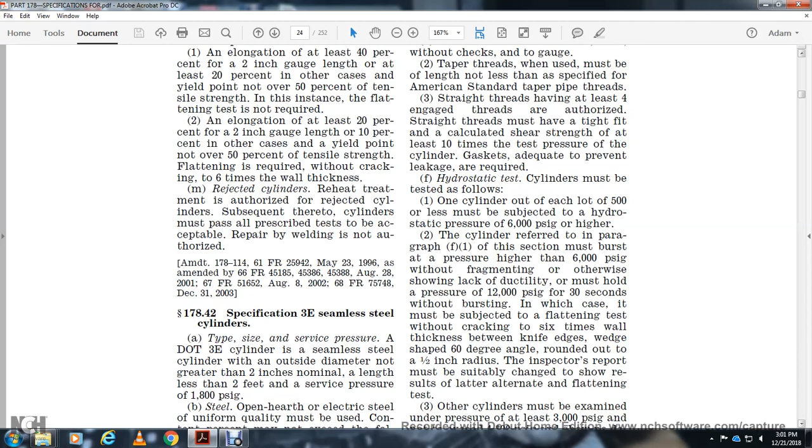Type, size, service pressure for DOT 3E cylinders: seamless steel cylinders with outside diameter not greater than 2 inches nominal, length less than 2 feet, with a service pressure of 1800 psi gauge. Steel: open-hearth or electric steel of uniform quality must be used, with content percent not exceeding the following: carbon 0.55, phosphorus 0.045, sulfur 0.050.

Identification: steel materials must be identified by any suitable method. Manufacture: cylinders must be manufactured by the best appliances and methods. No defect is permitted that is likely to weaken the finished cylinder appreciably. A reasonably smooth and uniform surface finish is required.

The thickness of the bottom is under no condition to be less than 2 times the minimum wall thickness of the cylinder shell. Such bottom thickness must be measured within an area bound by a line representing the points of contact between the cylinder and floor when the cylinder is in a vertical position.

All right, openings in the cylinder for connection with the valve or fuse plug. For the openings, threads conforming with the following are required. The opening threads must be clean cut, even, without checks, and to gauge. Taper threads, when used, must be of length not less than specified for American Standard taper pipe threads.

Straight threads having at least 4 engaged threads are authorized. Straight threads must have a tight fit and calculated shear strength of at least 10 times the test pressure of the cylinder, with a gasket adequate to prevent leakage.

Hydrostatic test: cylinders must be tested as follows. One cylinder out of each lot of 500 or less must be subjected to a hydrostatic pressure of 6000 psi gauge or higher. The cylinder referred to in paragraph F1 of this section must burst at a pressure higher than 6000 psi gauge without fragmentation or otherwise showing lack of ductility, or must hold at 12000 psi gauge for 30 seconds without bursting,

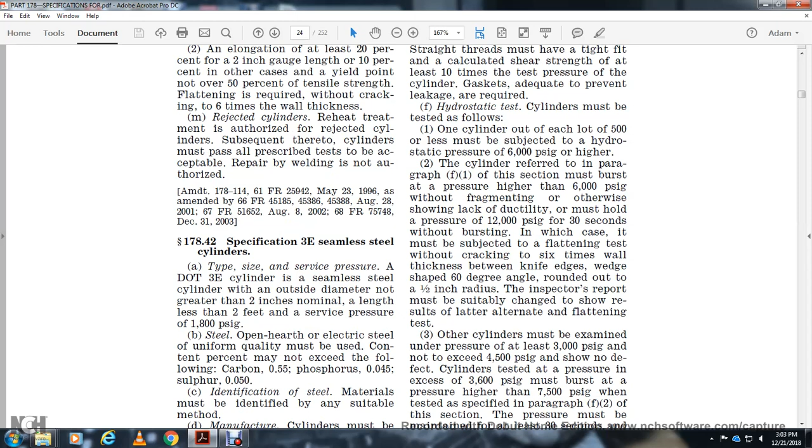Other cylinders must be examined under pressure of at least 3000 psi gauge, not exceeding 4,500 psi gauge, and show no defect. Cylinders tested at a pressure in excess of 3,600 psi must burst at a pressure higher than 7,500 psi gauge. When the test is as specified in F2, the pressure must be maintained for at least 30 seconds and sufficiently longer to ensure complete examination.

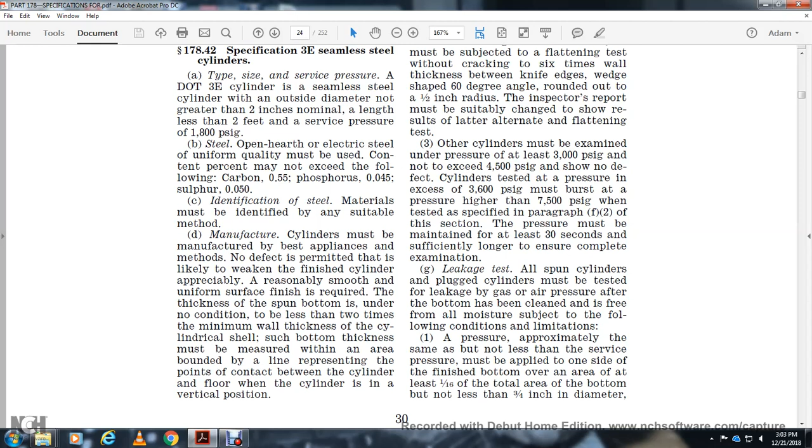Leak test. The spun cylinder or plugged cylinder must be tested for leakage by gas or air pressure after the bottom has been cleaned and is free from all moisture, subject to the following conditions and limitations. Pressure approximately the same as, but not less than, the service pressure must be applied to one side of the finished bottom over an area of at least 1/16 of the total area of the bottom, not less than 3/4 of an inch in diameter, including the closure, for at least 1 minute, during which time the other side of the bottom exposed to pressure must be covered with water and closely examined.

In case of leakage, except as provided in paragraph H of this section, the cylinder must be rejected if any leakage occurs. A spun cylinder is one in which an end closure in the finished cylinder has been welded by the spinning process. A plugged cylinder is one in which the permanent closure in the bottom of the finished cylinder has been effected by a plug.

Safety precaution: if the manufacturer elects to make this test before the hydrostatic test, the manufacturer shall design the test apparatus so that the pressure is applied to the smallest area practicable around the point of closure, so as to use the smallest possible volume of air or gas.

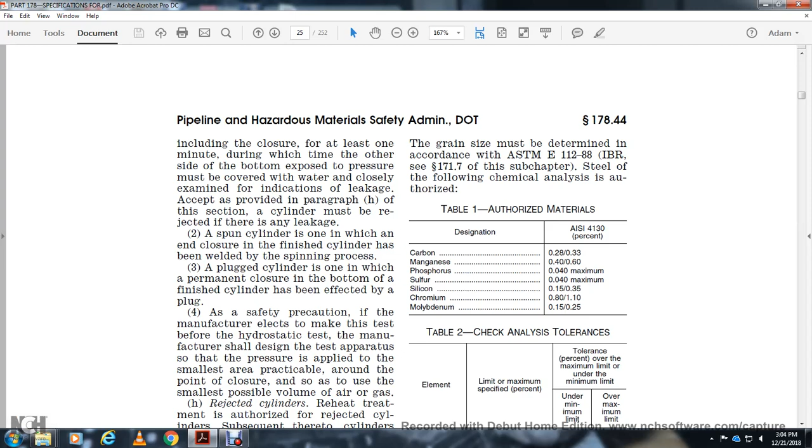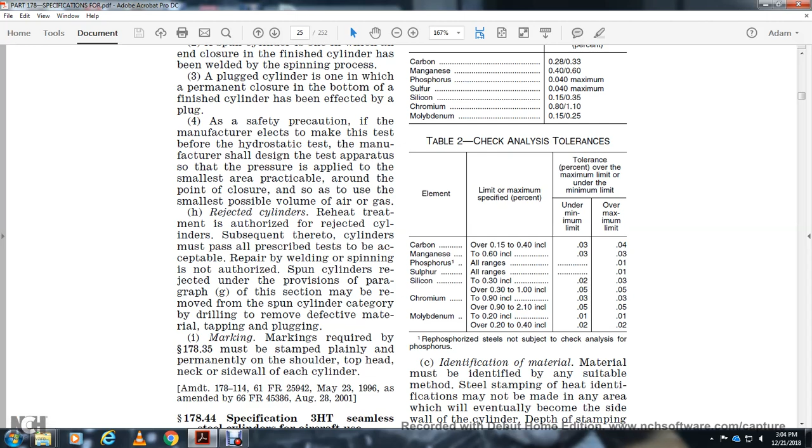Markings required for this 178.35 must be stamped plainly and permanently on the shoulder of the top head of the neck or the side wall. 178.44 specification 3HT seamless steel aircraft. The type, size, and service pressure: a DOT 3HT cylinder is seamless steel with water capacity not over 150 pounds and service pressure of 900 psi gauge.

Authorized steel: open hearth or electric furnace steel of uniform quality. The heat of the steel must be within the limits listed in table 1 of paragraph B, with the check chemical analysis slightly out of the specified range acceptable if satisfactory in all other respects, provided the tolerance in table 2 of paragraph B is not exceeded. The maximum grain size shall be 6 or finer. Grain size must be determined in accordance with ASTM E112,

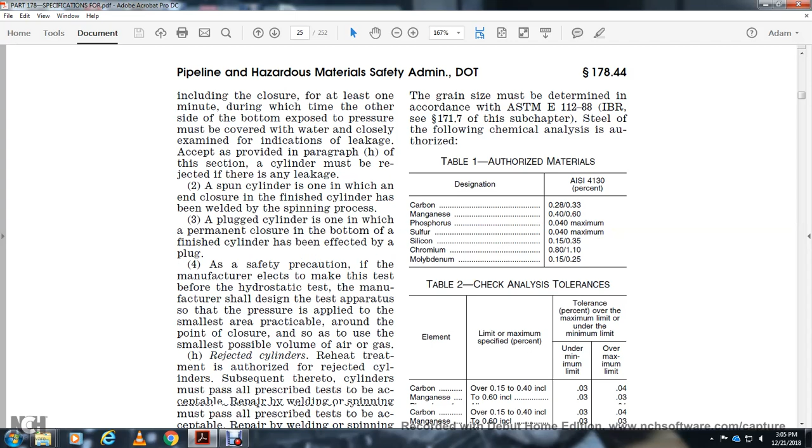112-88 and IBR 171.7 of this subchapter. Steel with the following chemical analysis is authorized, and then the chemicals are shown in the table of analysis tolerance. Identification of material. Material must be identified by a suitable method. Steel stamping of the heat identification may not be made in any area that will eventually become the side wall of the cylinder. Depth of the stamping may not encroach upon the minimum prescribed wall thickness of the cylinder.

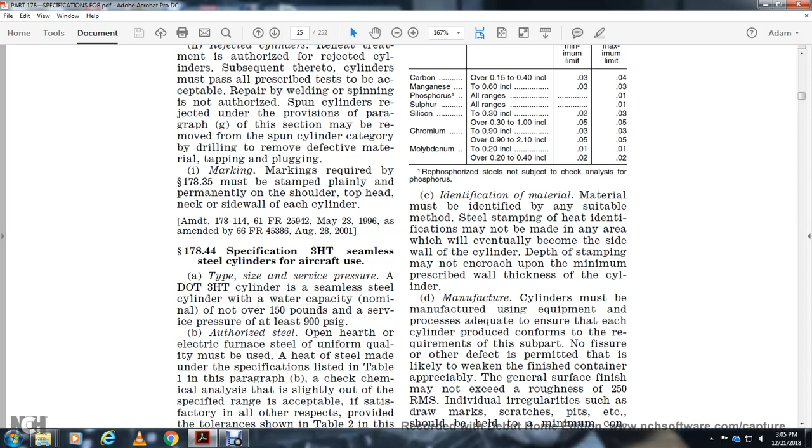Manufacture: the cylinder must be manufactured using equipment and processes adequate to ensure each cylinder produced conforms with the requirements of the subpart. No fissure or other defect is permitted that is likely to weaken the finished container appreciably. The general surface of the finish may not exceed a roughness of 250 RMS. Individual irregularities such as draw marks, scratches, pits, etc. should be held to a minimum consistent with good high pressure vessel manufacturing practice.

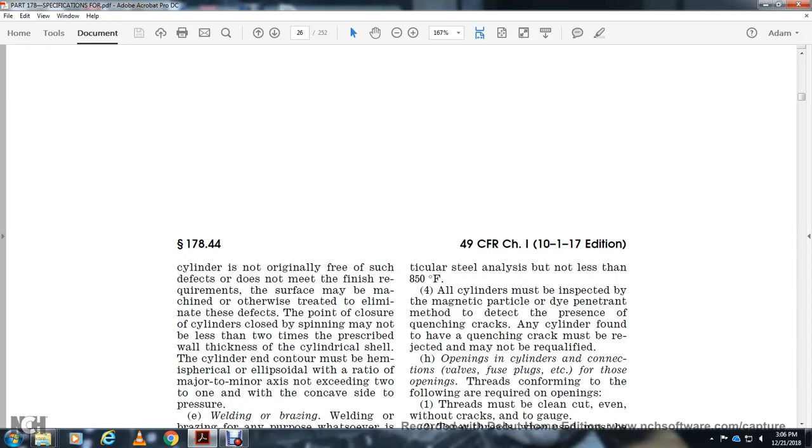If the cylinder is not originally free of such defects or does not meet the finish requirements, the surface may be machined or otherwise treated to eliminate the defects. The thickness at the point of closure of the cylinder closed by spinning may not be less than 2 times the prescribed wall thickness of the cylinder shell. The cylinder end contour must be hemispherical or ellipsoidal, with the ratio of the major and minor axis not exceeding two to one, with the concave side to pressure. Welding and brazing for any purpose whatsoever are prohibited, except for welding by spinning to permanently close the bottom of spun cylinders. Machining and grinding to produce the proper surface finish at the point of closure is required.

Wall thickness, minimum wall thickness. The wall of the cylinder must be at least 50 thousandths of an inch minimum wall thickness. It must be such that the wall stress at the minimum specified test pressure may not exceed 75% of the minimum tensile strength of the steel, as determined from the physical tests required in paragraph M of the section, and may not be over 105,000 psi. Calculations must be made by the following formula. Wall thickness of hemispherical bottoms is permitted at 90% of the minimum wall thickness. Each cylinder side wall may not be less than 50 thousandths of an inch, and in all other cases the thickness is no less than the prescribed minimum wall.

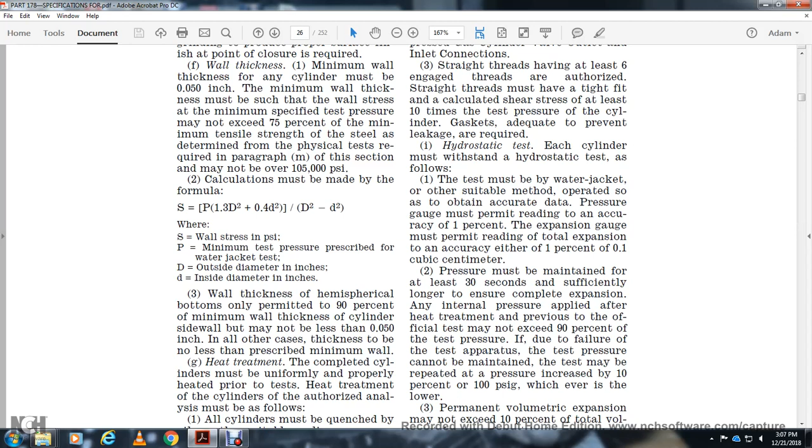Heat treatment. The completed cylinders must be uniformly and properly heat treated prior to test. Heat treatment of the cylinders of the authorized analysis must be as follows. All cylinders must be quenched in oil or other suitable medium. The temperature from which quenched must not exceed that recommended for the steel analysis and must not exceed 1,750 degrees Fahrenheit. Steel must be tempered at a temperature most suitable for the particular steel analysis, but not less than 850 degrees Fahrenheit.

All cylinders must be inspected by the magnetic particle or dye penetrant method to detect the presence of quenching cracks. Any cylinder with quenching cracks must be rejected. It may not be requalified. Openings and connections for valves, fuse plugs, etc. The openings must be threaded conforming to the following requirements: threads must be clean cut, even, without cracks, and to gauge. Taper threads, when used, of a length not less than specified for the National Gas Tapered Thread (NGT), are required. American Standard compressed gas cylinder valve outlet and inlet connections.

Straight threads have at least 6 engaged threads authorized, and straight threads must have a tight fit with a calculated stress shear with at least 10 times the test pressure for the cylinder. The gasket must be adequate to prevent leakage as required.

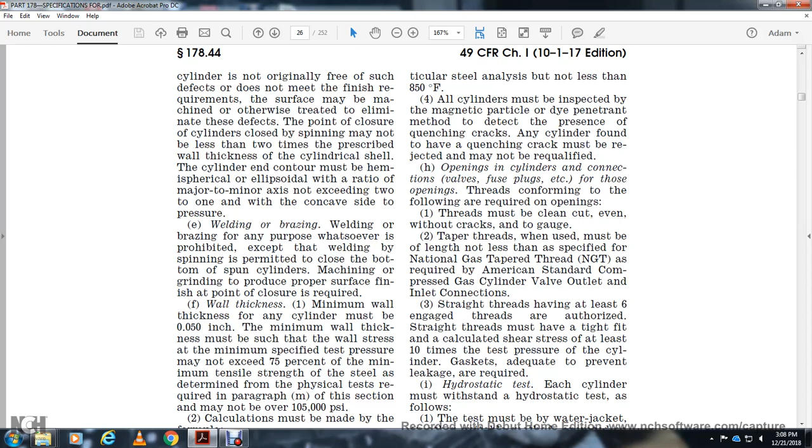Hydrostatic test: each cylinder must withstand the hydrostatic test. The test must be conducted with water-jacket or other suitable method to obtain accurate data. The pressure gauge must permit reading accurate to 1%, and the expansion gauge must permit reading of the total expansion, accurate to 1% or 0.1 cubic centimeter.

The pressure must be maintained for at least 30 seconds, sufficiently long to ensure complete expansion. The internal pressure applied prior to the official test, after heat treatment, may not exceed 90% of the test pressure.

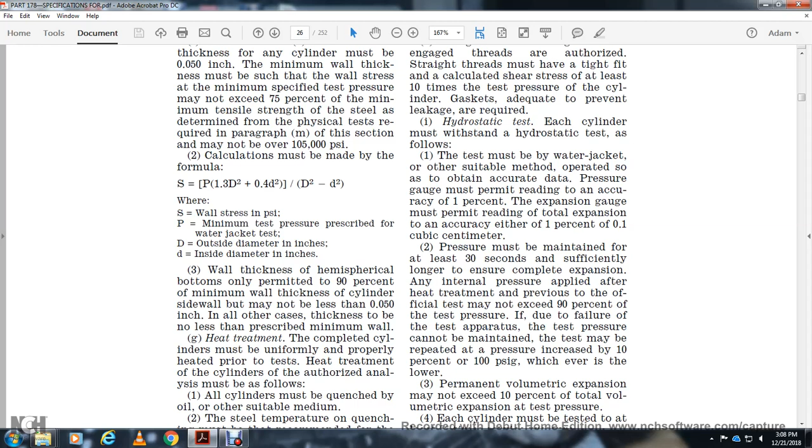If due to failure of the test apparatus the test pressure cannot be maintained, the test may be repeated with the pressure increased by 10% or 100 psi gauge, whichever is less. The permanent volumetric expansion may not exceed 10% of the total volumetric expansion.

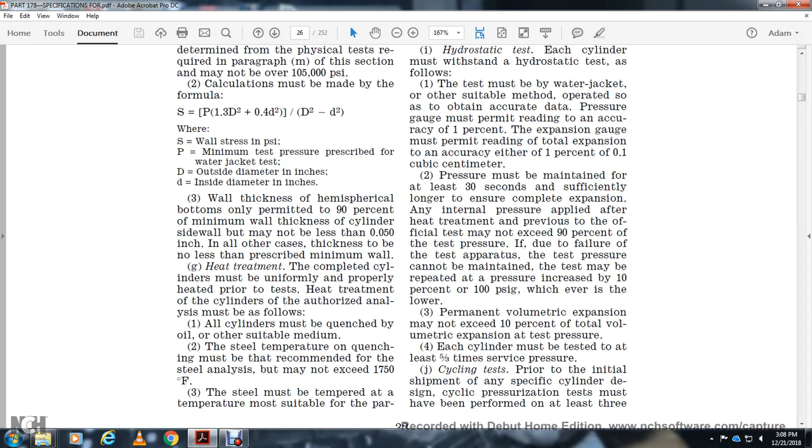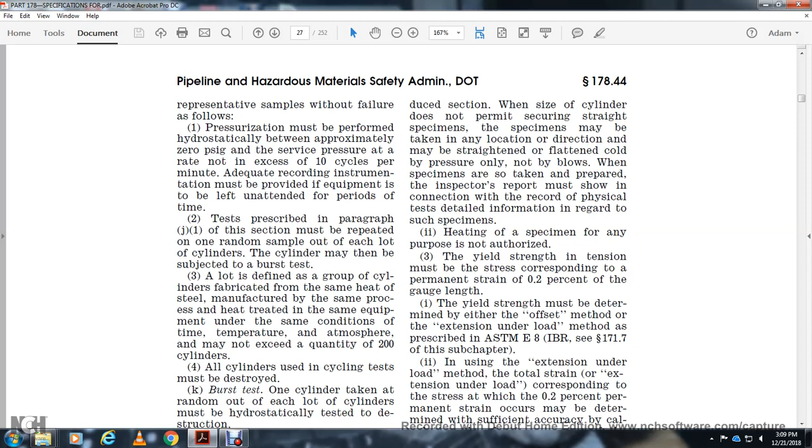All cylinders used in the cycling test must be destroyed. Burst test: one cylinder taken, selected at random out of each lot, must be hydrostatically tested to destruction.

Flattening test: a flattening test must be performed on one cylinder, taken at random from each lot of 200 or less. The cylinder is placed between wedge-shaped edges having a 60-degree included angle, rounded to a half-inch radius, with the longitudinal axis of the cylinder at a 90-degree angle to the knife edge during the test.

For lots of 30 or less, the flattening test is authorized to be performed on a ring at least 8 inches long, cut from the cylinder. Each cylinder is subject to the same heat treatment.

The thin cylinder physical test must be conducted to determine yield strength, elongation, and reduction of area of the material as follows. The test requires 2 specimens from one cylinder, taken at random from each lot.

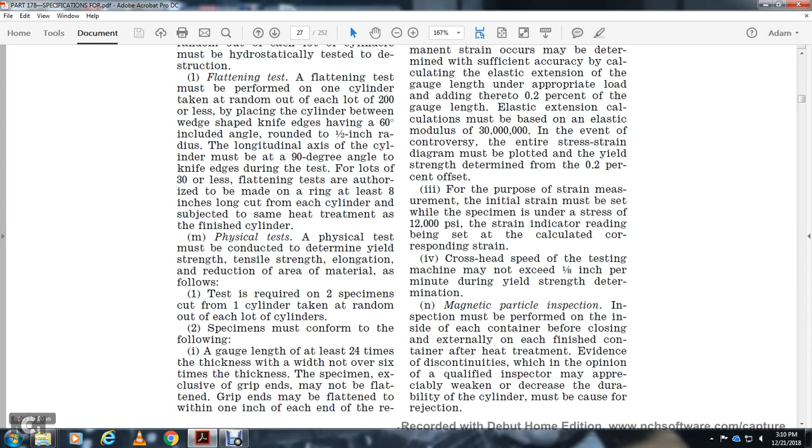Specimens must conform to the following gauge length: at least 24 times the thickness, width not over 6 times the thickness of the specimen, exclusive of the grip ends. The specimen may not be flattened, with the grip ends flattened 1 inch beyond the reduced section, where the size of the cylinder does not permit a straight specimen.

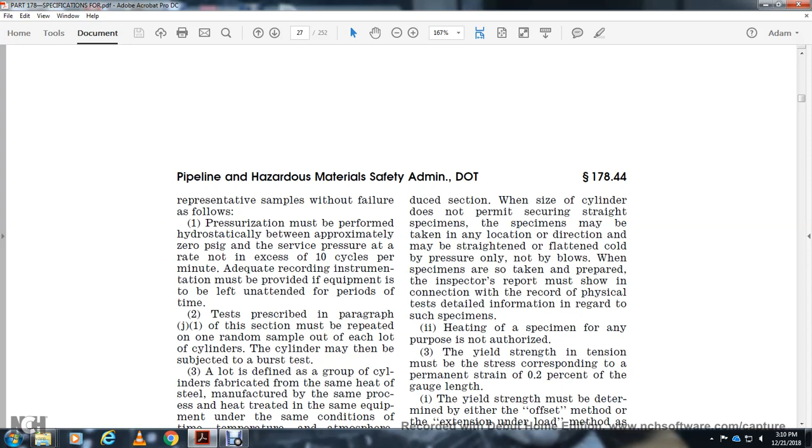Yield strength in tension must be the stress corresponding to a permanent strain of 0.2% of the gauge length. The yield strength must be determined by either the offset method or the extension-under-load method, as prescribed in ASTM E8.

When using the extension-under-load method, the total strain corresponding to the 0.2% permanent strain occurring must be determined with sufficient accuracy by calculating the elastic extension for the gauge length under appropriate load, adding 0.2% of the gauge length. The elastic extension calculation must be made with a modulus of 30 million.

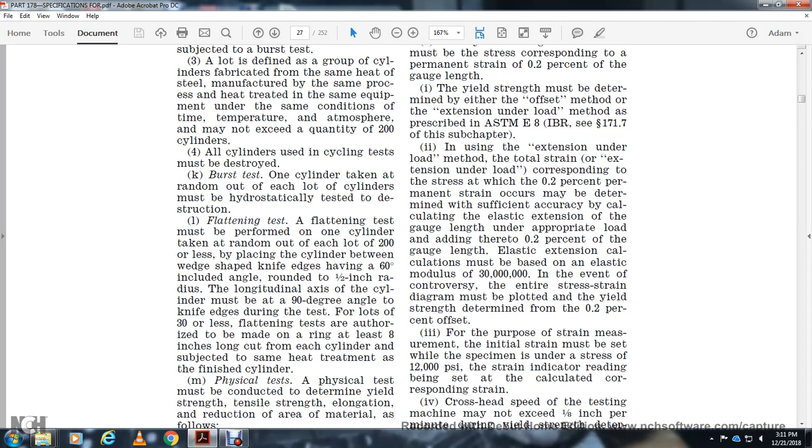In an event with a controversy, the entire stress-strain diagram must be plotted with the yield of the strain determined at 2/10% offset. For purpose of strain measure, the initial strain must be set with a specimen as under the 12,000 psi, the strain indicator reading is set with a calculated gauge strain.

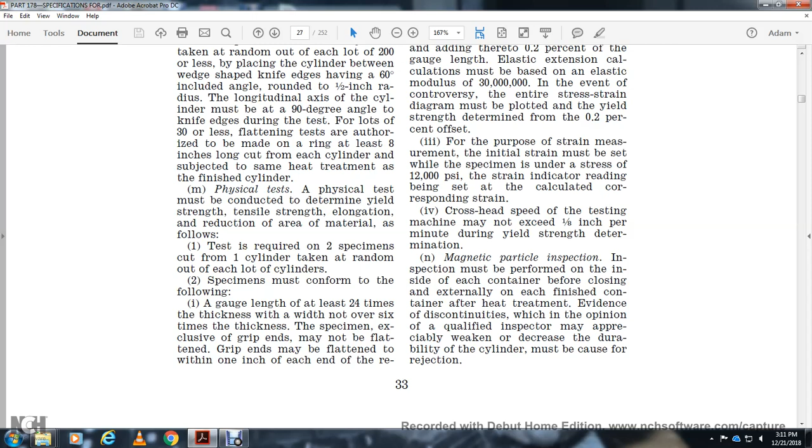Inspection must be performed inside each container before closing, externally on each finish of the container, after heat treating. Evidence of discontinuity and use, which in the opinion of the qualified inspector may appreciably weaken the cylinder, must be cause for rejection.

Leakage test: all spun cylinders and plug cylinders must be tested for leakage using dry gas or dry air pressure after the bottom has been cleaned and is free of all moisture, subject to the following conditions.

Indication of a leak, except for paragraph Q, means the cylinder must be rejected. A spun cylinder is one in which the end closure in the finished cylinder has been welded by a spinning process. A plug cylinder is one with a permanent closure for the bottom of the finished cylinder effected with a plug.

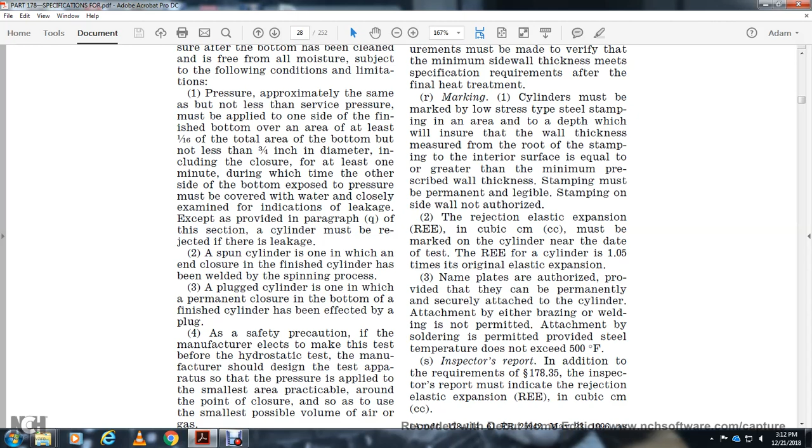Safety precaution: the manufacturer elects to make this test before hydrostatic tests. The manufacturer shall design test apparatus so the pressure is applied with the smallest area practicable around the point of closure, so as to use the least possible volume of air and gas.

Acceptable result of the test: result of flattening test. The physical test, the burst test, and cycling test, must conform with the following: flattening required without cracking with 10 times the wall thickness, considering it as a cylinder.

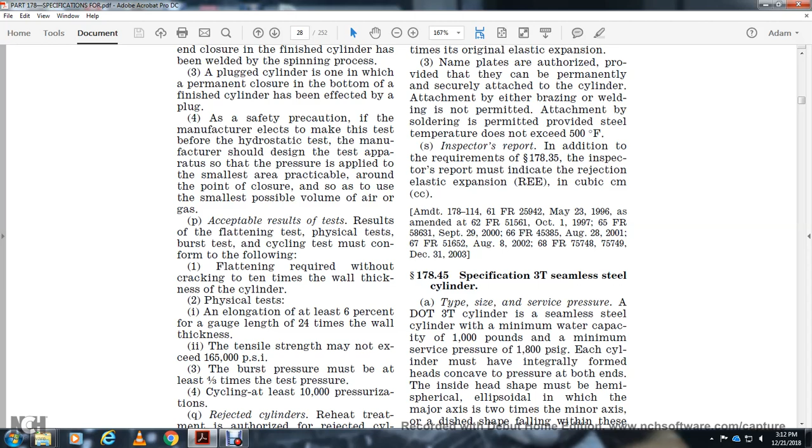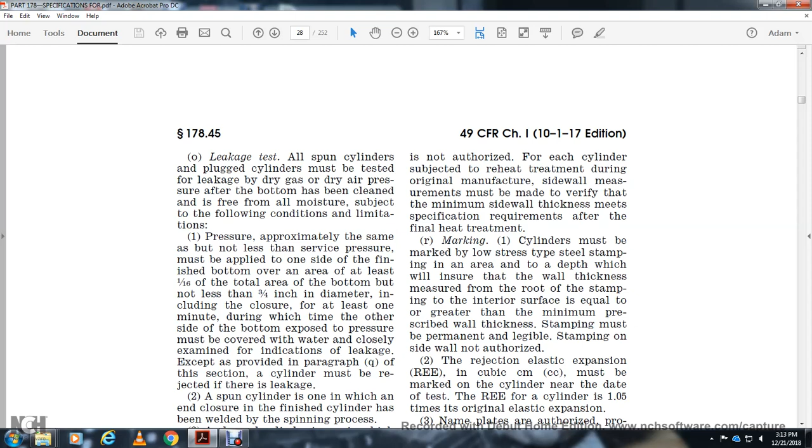Stamping must be permanent and legible. Stamping on the sidewall is not authorized. Rejection elastic expansion in cubic centimeters must be marked on the cylinder near the date of the test. Rejection elastic expansion is when the cylinder reaches 1.05 times the original elastic expansion.

Inspector's report and additional requirements of 178.35: the inspection report must indicate the rejection elastic expansion in cubic centimeters.

178.45 specification 3T seamless steel cylinders: type, size, and service pressure. For DOT 3T cylinders, a seamless steel cylinder with a water capacity of 1,000 pounds minimum service pressure of 1,800 psi gauge. Cylinders must have integral heads, concave to pressure, at both ends with inside head shape.

Material: steel made by the open hearth, electric furnace, or basic oxygen process, with uniform quality. The steel analysis must meet the following requirements, and they show the analysis tolerances.

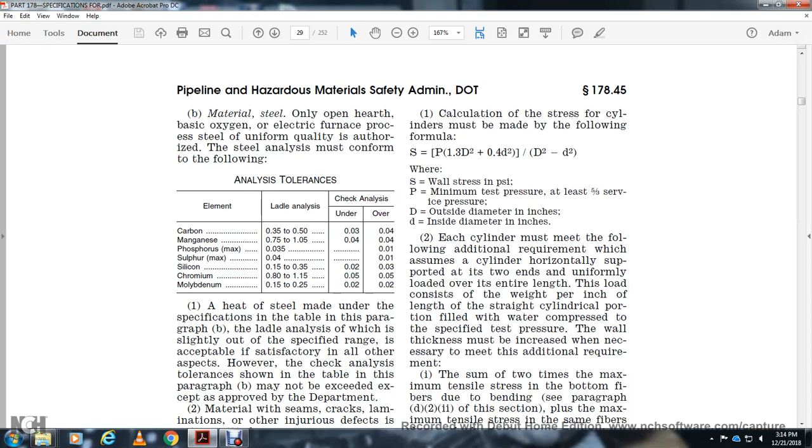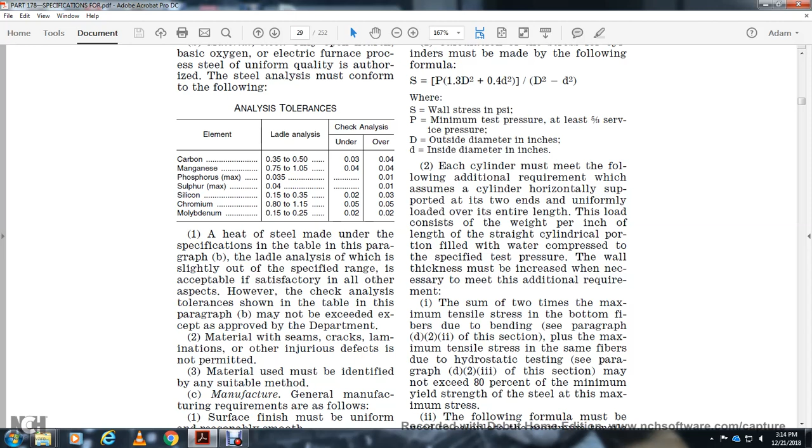Material seams, cracks, laminations, or other injurious defects are not permitted. Material used must be identified by any suitable method.

General manufacturer requirements are as follows: surface finish must be uniform, reasonably smooth. The inside surface must be clean, dry, and free of loose particles. No defect of any kind permitting leakage is allowed in the finished cylinder.

If the cylinder surface has a defect, it may be otherwise treated to eliminate the defect, provided the minimum wall thickness is maintained. Welding and brazing of the cylinder are not permitted.

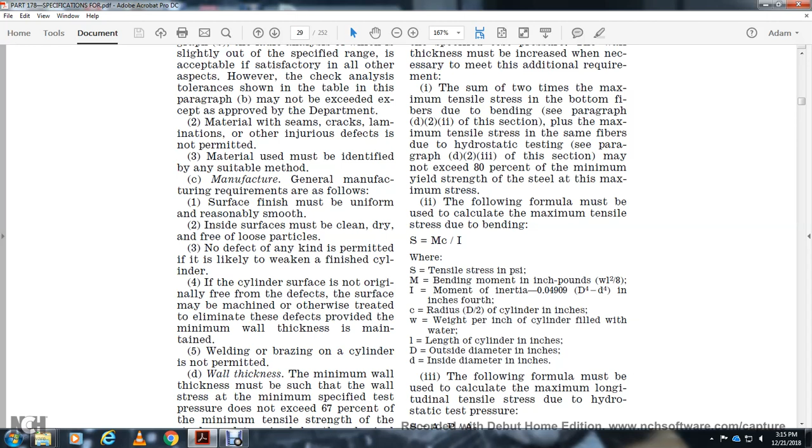Calculations of the stress for cylinders must be made with the following formula, and each cylinder must meet the following additional requirements, assuming the cylinder is horizontal, supported at the two ends, with a uniform load along its length, loaded consistently by weight per inch of the straight cylinder, a portion filled with water compressed at the specified test pressure.

Wall thickness must be increased if necessary to meet the additional requirements.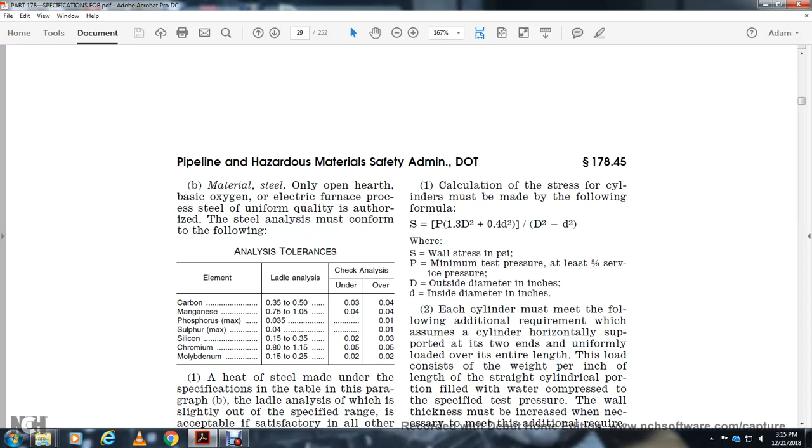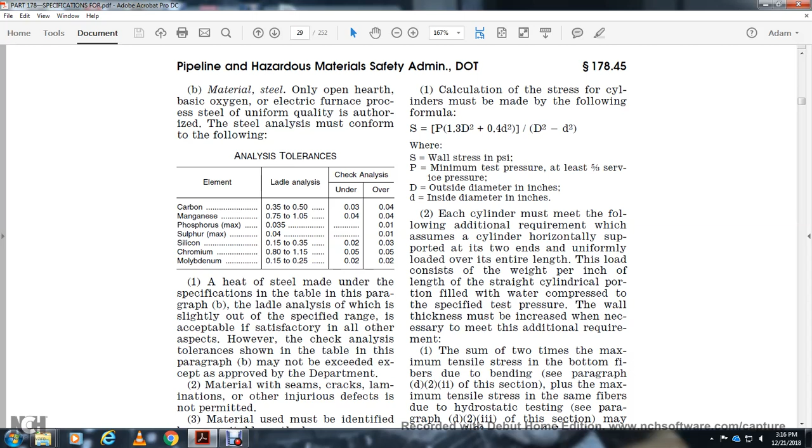The sum of two times the maximum tensile stress at the bottom fiber due to bending, per paragraph D2.2 of this section, plus the maximum tensile stress of the same fiber during hydrostatic testing per paragraph D2.3 of this section, may not exceed 80% of the minimum yield strength of the steel at maximum stress.

The following formula must be used to calculate the maximum tensile stress due to bending. The following formula must be used to calculate the minimum maximum longitudinal stress during the hydrostatic test pressure.

Heat treatment: each complete cylinder must be uniformly and properly heated to arrive at the proper testing temperature. Each cylinder must be held at the proper temperature for at least one hour per inch of the maximum thickness of the cylinder, then quenched with a suitable liquid medium at a cooling rate not exceeding 80% of water.

At 1,050 degrees Fahrenheit, it must be held at temperature for at least one hour per inch of thickness, based on the maximum thickness of the cylinder. Each cylinder must then be cooled under recommended conditions.

Cylinder openings must comply with the following: openings are permitted in the heads, provided the inside diameter of any centered opening of the head does not exceed half the outside diameter of the cylinder.

Openings in the heads must have ligaments between openings at least three times the average hole diameter. No offset openings greater than 2.625 inches in diameter are permitted. All openings must be circular.

All openings must be threaded. Threads must comply with the following: each thread must be clean cut, even, without any checks, and to gauge.

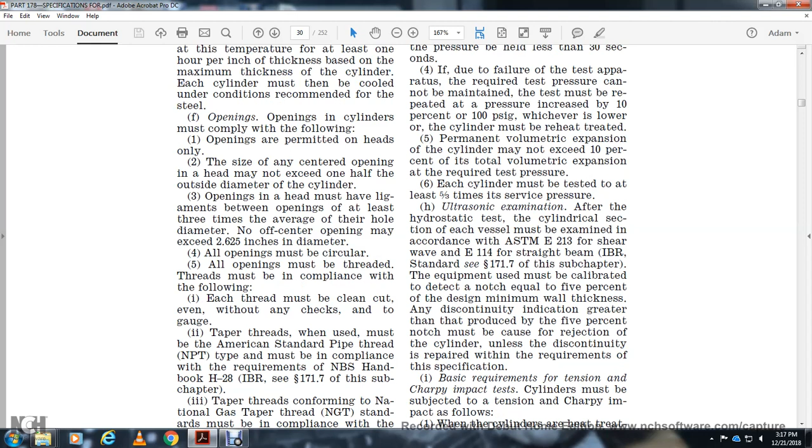The taper threads, either American Standard Pipe thread (NPT) type, must comply with the requirements of NBS Handbook H28. Taper threads conform to the National Gas Taper thread (NGT) standard, which must also comply with the requirements of NBS Handbook H28.

Straight threads conform to the National Gas Straight thread (NGS) standard, and are authorized. These threads must be in compliance with the requirements of NBS Handbook H28.

Hydrostatic testing: each cylinder must be tested with internal pressure using the water jacket method or another suitable method conforming to the following requirements.

A testing apparatus must be operated to determine accurately the pressure; the pressure gauge must permit reading to an accuracy of 1%, and the expansion gauge must permit reading of the total expansion to an accuracy of 1%.

Internal pressure applied to the cylinder after heat treatment and before the official test must not exceed 90% of the test pressure. Pressure must be maintained sufficiently long to accurately complete the expansion of the cylinder, and hold the pressure for at least 30 seconds.

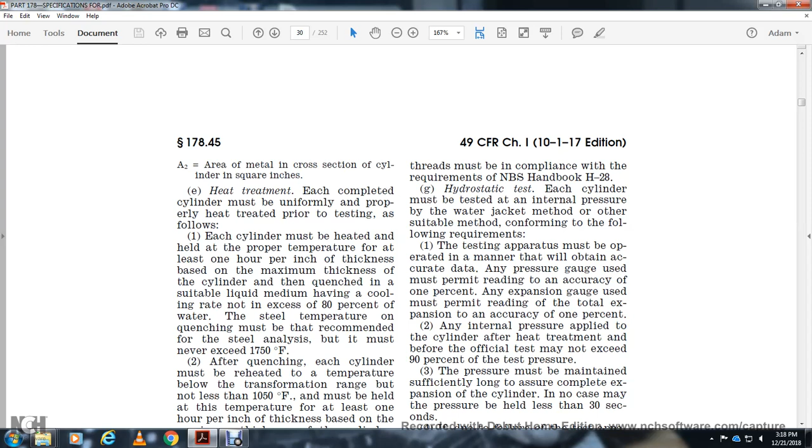If, due to failure of the test apparatus, the required test pressure cannot be maintained, the test must be repeated at a pressure increased by 10% or 100 psi, whichever is the lower, or the cylinder must be reheat treated.

Permanent volumetric expansion of the cylinder may not exceed 10% of the total volumetric expansion at test pressure, and each cylinder must be tested to 5/3 times the service pressure. Ultrasonic examination: after the hydrostatic test, the cylindrical section of each vessel must be examined in accordance with ASTM E213 shear wave and E114 straight beam.

The equipment used to examine must be calibrated to detect a notch equal to 5% of the design minimum wall thickness. Any discontinuity indication greater than that produced by the 5% notch must cause rejection of the cylinder, unless the discontinuity is repaired in accordance with the requirements of this section.

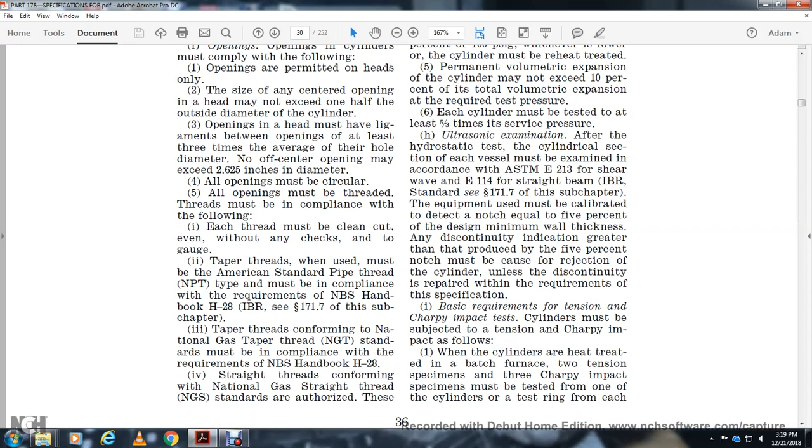Basic requirements for tension and Charpy impact tests: cylinders must be subjected to tension and Charpy impact tests. When the cylinders are heat treated in a batch furnace, 2 tension specimens and 3 Charpy impact specimens must be taken from one cylinder or test ring from each batch. The lot represented by the test must not exceed 200.

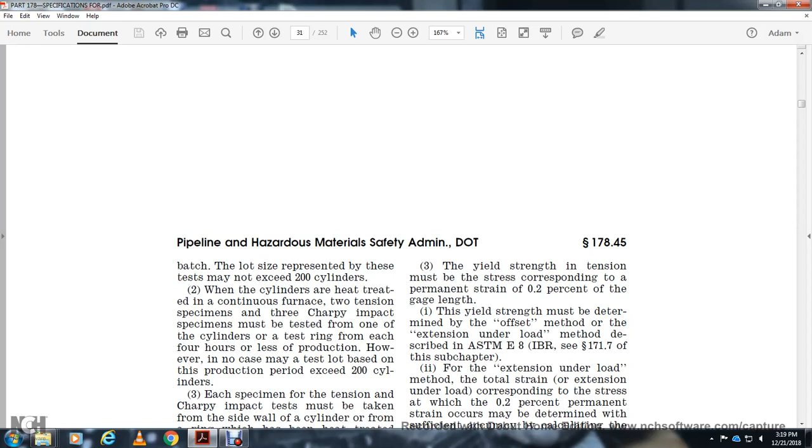When the cylinders are heat treated in a continuous furnace, 2 tension specimens and 3 Charpy impact specimens must be tested from one cylinder or test ring for each four hours of production. However, in no case may a test lot based on this production period exceed 200 cylinders.

Each specimen for the tension and Charpy impact tests must be taken from the side wall of a cylinder or from a ring which has been heat treated with the finished cylinders, and the axis of the specimen must be parallel to the axis of the cylinder. Each cylinder or ring specimen for the test must be of the same diameter and thickness of metal.

Each test ring must be at least 24 inches long with the ends covered during the heat treatment process to simulate the heat treatment process of the finished cylinders it represents. A test cylinder or test ring need represent only one heat and furnace batch, provided the other heats in the batch have previously been tested and have passed the tests, and such tests do not represent more than 200 cylinders from one heat.

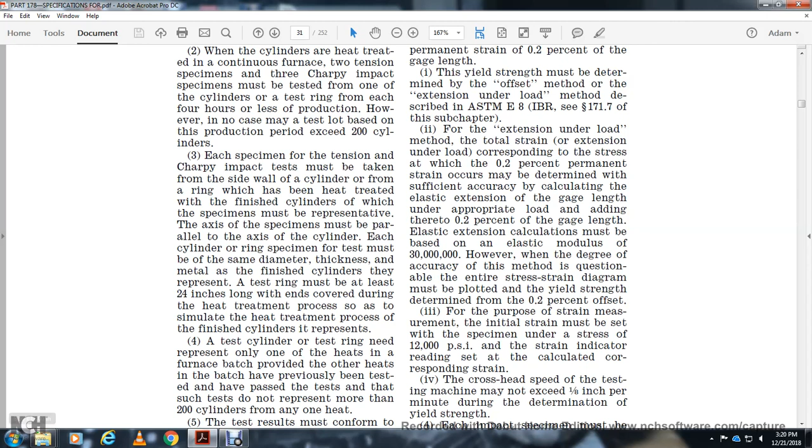The test results must conform with the requirements specified in paragraphs J through K of this section. When the test results do not conform with the requirements specified, the cylinders represented by the test must be reheat treated and the tests repeated. Paragraph I 1 through 5 of this section applies to retesting.

Acceptable physical testing: the following criteria must be followed to obtain acceptable physical test results. Each tension specimen must have a gauge length of 2 inches with a width not exceeding 1.5 inches. Except for the grip ends, the specimen may not be flattened. Grip ends may be flattened to within 1 inch of each end of the reduced section. The specimen may not be heated after the heat treatment specified in paragraph D of this section.

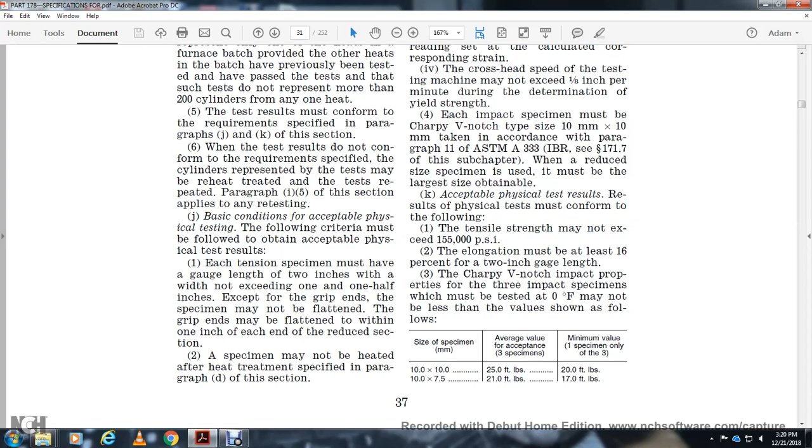The yield strength in tension must be the stress corresponding to a permanent strain of 2/10% of the gauge length. Yield strength must be determined by either the offset method or the extension under load method described in ASTM E8. For the extension under load method, the total strain or extension under load corresponding to the stress at which the 2/10% permanent strain occurs may be determined with sufficient accuracy by calculating the elastic extension of the gauge length under appropriate load and adding 2/10% of the gauge length. Elastic extension calculations must be based on an elastic modulus of 30 million.

However, when the degree of accuracy of the method is questionable, the entire stress-strain diagram must be plotted, with the yield strength determined at 2/10% offset. For the purpose of strain measurement, the initial strain must be set with the specimen under a stress of 12,000 psi, with the strain indicator reading set at the calculated corresponding strain. The crosshead speed of the testing machine will not exceed 1/8 of an inch per minute during the determination of yield strength.

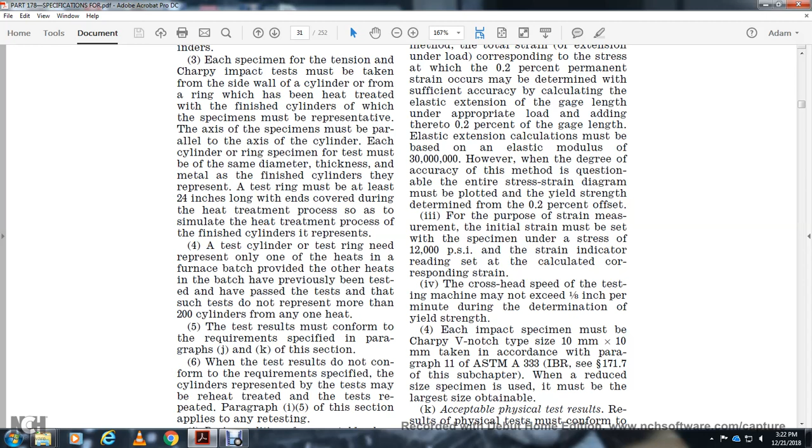For each impact test, the specimen must be Charpy V-notch type, 10 millimeter by 10 millimeter, taken according to paragraph 11 of ASTM A333. When reducing the size of the specimen, it must be the largest size obtainable. The results of the physical test must conform with the following: tensile strength may not exceed 155,000 psi. Elongation must be at least 16% of the 2-inch gauge length.

Charpy V-notch impact properties for the 3 impact specimens, which must be tested at 0 degrees, may not be less than the values as follows. After the final heat treatment, each vessel may be hardness tested on the cylindrical section, with the tensile strength equivalent of the hardness number obtained not more than 165,000 psi. When the result of the hardness test exceeds the maximum permitted, 2 or more retests must be made. However, the hardness number obtained with the retest must not exceed the maximum permitted.

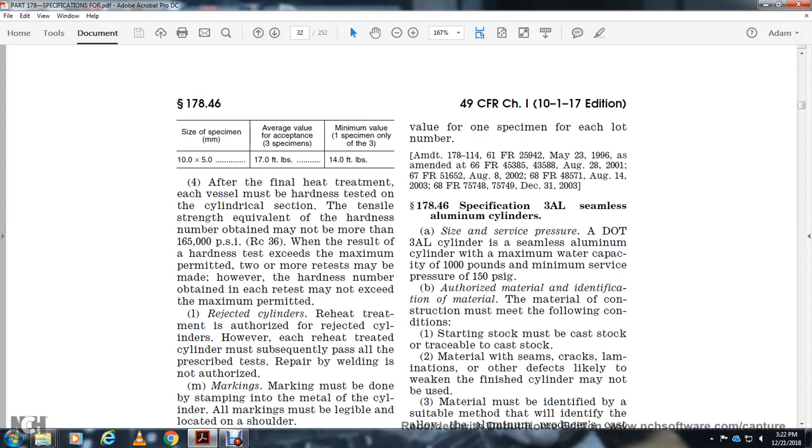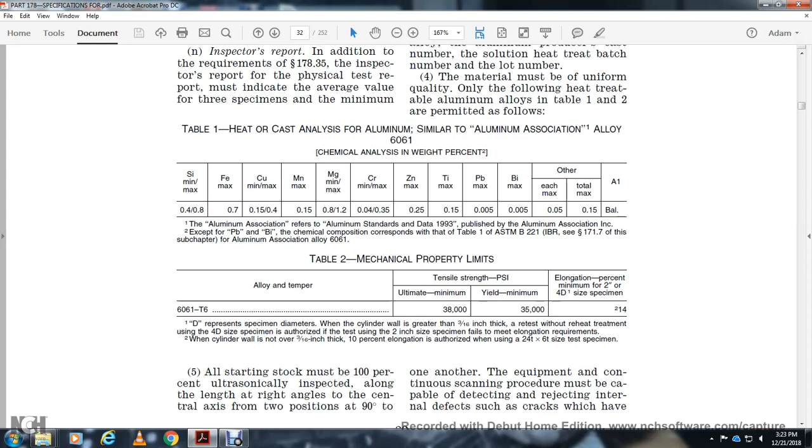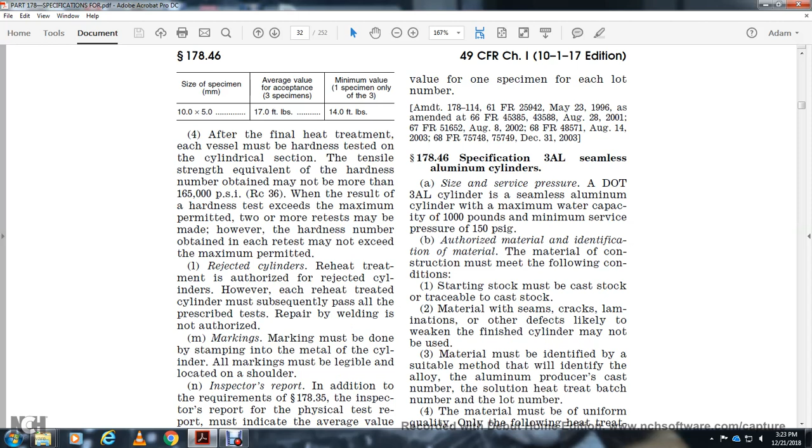178.46 Specification 3AL seamless aluminum cylinders. Size and service pressure: 3AL seamless aluminum cylinders, maximum water capacity 1,000 pounds, minimum service pressure 150 psi. Authorized material, identification of material: construction must meet the following conditions. Starting stock must be cast stock traceable to the cast. Stock with seams, cracks, laminations or other defects likely to weaken the finished cylinders may not be used. The material must be identified by a suitable method that will identify the alloy, aluminum producer, cast number, solution heat treat batch number and lot. The material must be of uniform quality, and only the following heat treatable aluminum alloy in table 1 2 is permitted.

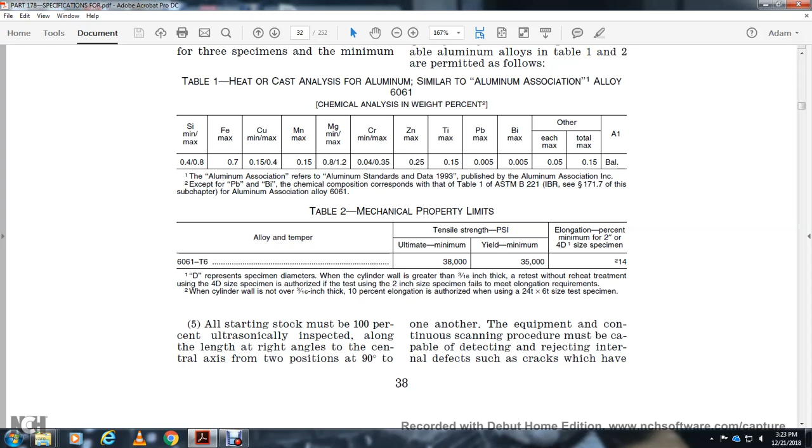Starting stock must be 100% ultrasonically inspected along its length at right angles to the central axis from 2 positions 90 degrees to one another. The equipment and continuous scanning procedure must be capable of detecting and rejecting internal defects such as cracks which have an ultrasonic response greater than the calibration block with a 5/64 of an inch diameter flat bottom hole. The cast stock must have a uniform equiaxed grain structure not exceeding 500 microns maximum. Starting stock that does not comply with paragraphs B1 through B6 of this section must be rejected.

Manufacture: cylinders must be manufactured in accordance with the following requirements. The cylinder shell must be manufactured by the backward extrusion method and have a cleanliness level adequate to ensure proper inspection. No fissure or other defect likely to weaken the finished cylinder below the design strength is acceptable. A reasonably smooth and uniform surface finish is required, free of such defects. Surfaces may be machined or otherwise conditioned to eliminate defects.

The thickness of the cylinder may not be less than the prescribed minimum wall thickness. The cylinder base must have a torispherical, hemispherical, or ellipsoidal interior base configuration with the dish radius not greater than 1.2 times the inside diameter. The shell knuckle radius may not be less than 12% of the inside diameter of the shell. The interior base contour may deviate from the true torispherical, hemispherical or ellipsoidal configuration provided.

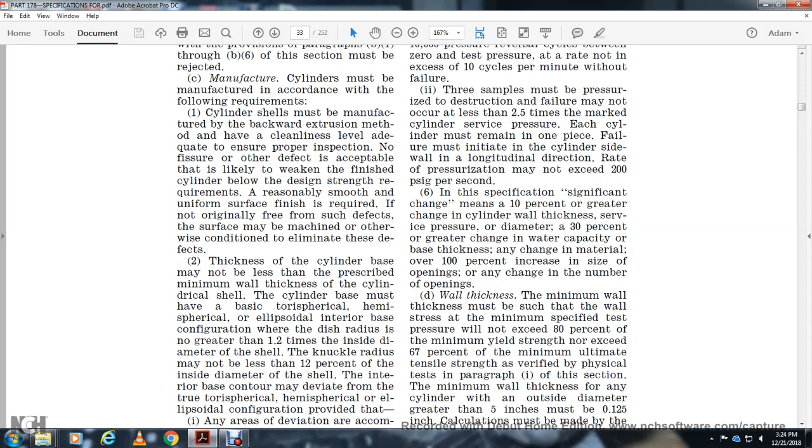Any area with deviation accomplished by increase of the base thickness, all radii equal to or greater than knuckle radius. Each of the designs must have been qualified by successfully passing cycling testing in paragraph C, with the detailed specification of the base design available to inspection. For freestanding cylinders, the base thickness must be at least 2 times the wall thickness along the line of contact between the cylinder base and the floor with the cylinder in the vertical position. Welding and brazing is prohibited.

Each new design or significant change to an acceptable design must be qualified for production by testing prototype samples. Three samples must be subjected to 100,000 pressure reversal cycles between 0 and service pressure, or 10,000 pressure reversal cycles between 0 and test pressure, at a rate not exceeding 10 cycles per minute without failure.

These 3 samples must be pressurized to destruction, with failure not to occur at less than 2.5 times the marked service pressure. Each cylinder must remain in one piece. The failure must be initiated in the cylinder side wall in a longitudinal direction, with a rate of pressurization not exceeding 200 psi gauge per second.

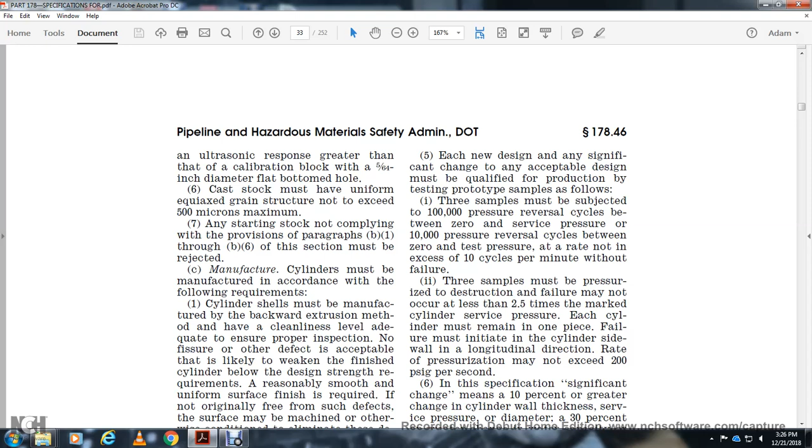In the specification, a significant change means a 10% or greater change in cylinder wall thickness, service pressure, or diameter; a 30% or greater change in water capacity or base thickness; any change in material; over 100% increase in the size of the openings; or any change in the number of openings.

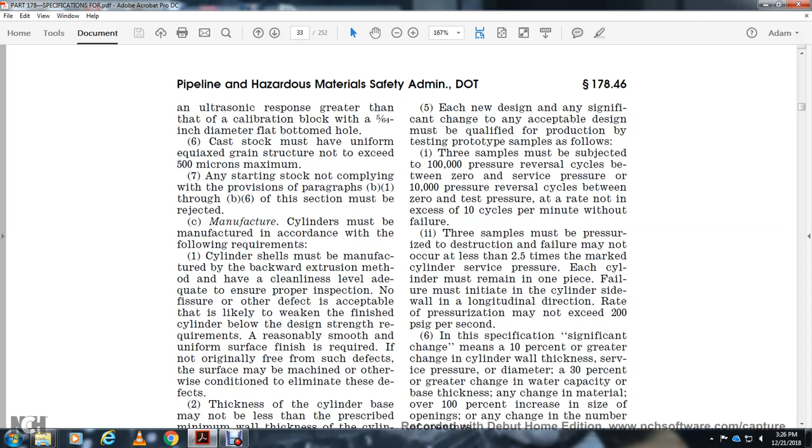Wall thickness: minimum wall thickness must be such that the wall stress at the minimum specified test pressure will not exceed 80% of the minimum yield strength, nor exceed 67% of the minimum ultimate tensile strength, as verified by physical tests prescribed in paragraph (i) of this section. Minimum wall thickness of any cylinder with an outside diameter greater than 5 inches is 0.125 inch, and the calculation must be made as in the following paragraph.

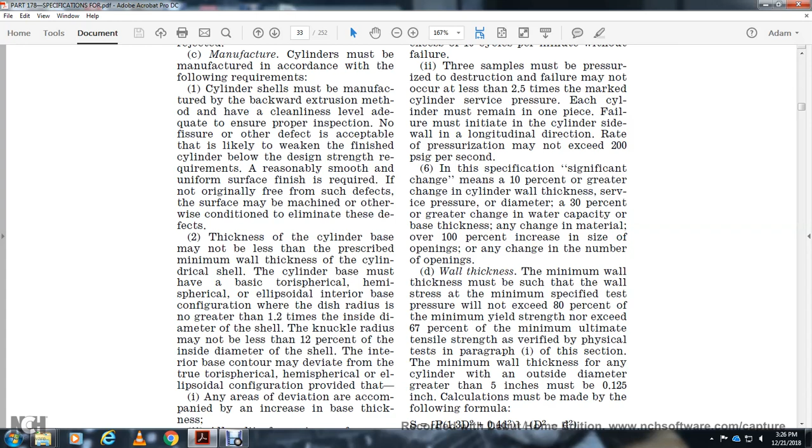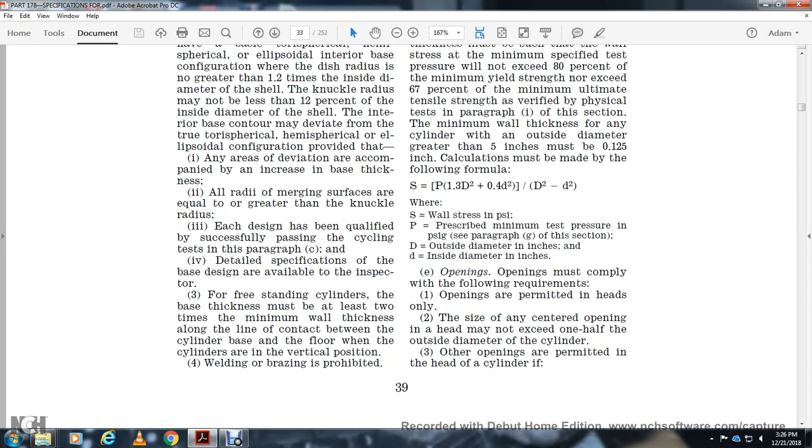Openings must comply with the following requirements. Openings are permitted in heads only. An opening in the head may not exceed 1/2 of the outside diameter of the cylinder. Other openings are permitted in the head of the cylinder if each opening does not exceed 2.625 inches or 1/2 of the outside diameter of the cylinder, whichever is less, and each opening is separated from each other by a ligament. Each ligament separating 2 openings must be at least 3 times the average of the diameters of the 2 openings. All openings must be circular. All openings must be threaded.

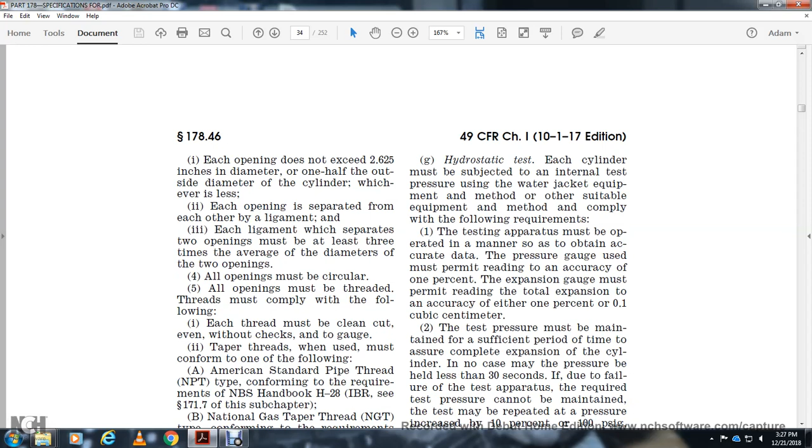Threads must comply with the following. Each thread must be clean cut, even, without checks, and to gauge. Taper threads, when used, must conform with the following: American Standard Pipe Thread type, conforming with the requirements of NBS Handbook H28; National Gas Taper thread, conforming with the requirements of NBS Handbook H28. Other taper threads conforming to other standards may be used provided the length is not less than that specified for NPT. Straight threads, when used, must conform with one of the following: National Gas Straight thread type, conforming with requirements of NBS Handbook H28.

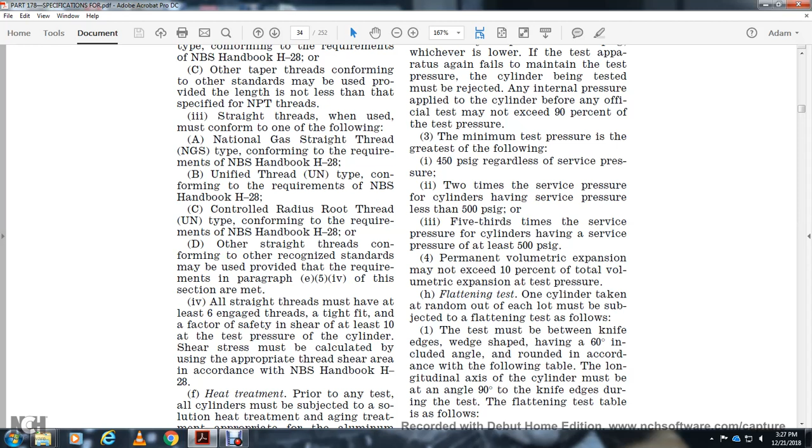Unified thread, conforming with the requirements of NBS Handbook H28. Controlled radius root thread, UNJ type, conforming with the requirements of NBS Handbook H28. Other straight threads conforming with a recognized standard may be used provided the requirements in paragraph (e)(5)(iv) of the section are met. All straight threads must have at least 6 engaged threads, a tight fit, and a factor of safety in shear of at least 10 at the test pressure. Shear stress must be calculated using the appropriate thread shear area in accordance with NBS Handbook H28.

Heat treatment: prior to any test, each cylinder must be subjected to solution heat treatment and aging treatment appropriate for the aluminum alloy used. Hydrostatic test: each cylinder must be subjected to an internal test pressure by the water jacket method or other suitable method, complying with the following requirements. Testing apparatus must be operated so as to obtain accurate data, including the pressure gauge.

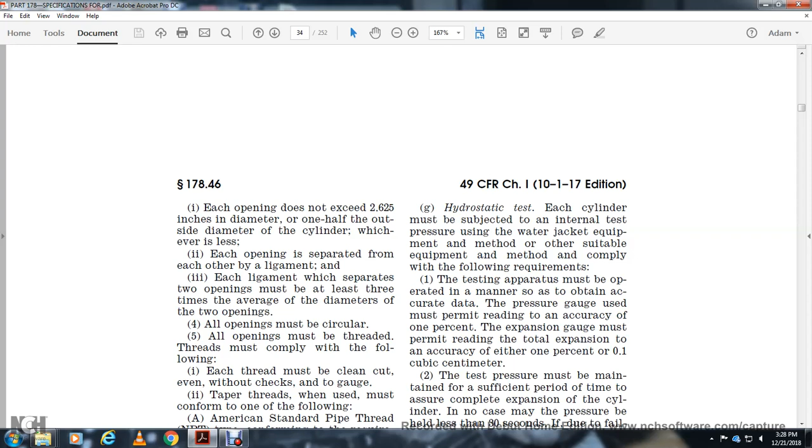The expansion gauge must permit reading accurately, to 1%, the total expansion, accurate to either 1% or a tenth of a cubic centimeter. The test pressure must be maintained for a sufficient period to ensure the complete expansion of the cylinder. Keep the pressure held for no less than 30 seconds.

Due to failure of the test apparatus, if the required test pressure cannot be maintained, the test may be repeated with the pressure increased by 10% or 100 psi gauge, whichever is lower. If the test apparatus again fails to maintain the test pressure, the cylinder must be rejected. Internal pressure applied to the cylinder before official tests may not exceed 90% of the test pressure.

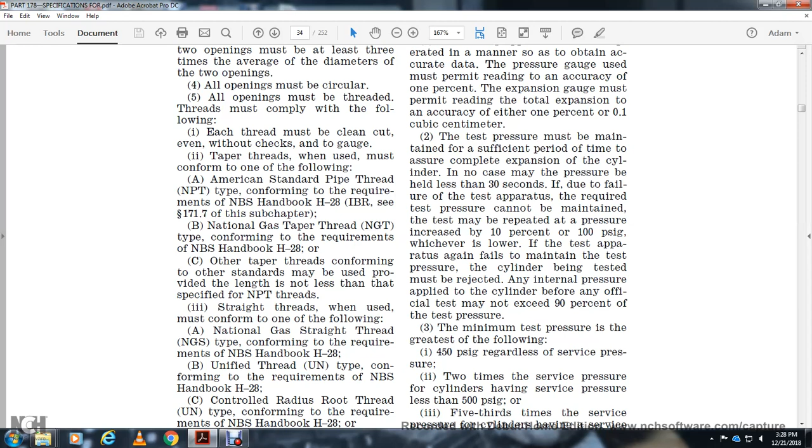Minimum test pressure is the greatest of the following: 450 psi gauge regardless of service pressure; 2 times the service pressure for cylinders with service pressure less than 500 psi gauge; 5/3 times the service pressure for cylinders with service pressure at least 500 psi gauge. Permanent volumetric expansion must not exceed 10% of the total volumetric expansion at test pressure.

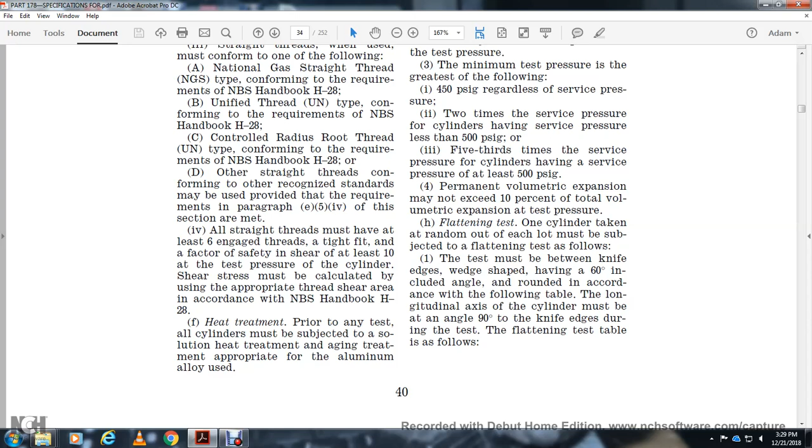Flattening testing: one cylinder taken at random out of each lot is subjected to the flattening test as follows. The test must be between knife-edge wedges with a 60 degree included angle, rounded as in the following table. The longitudinal axis of the cylinder must be at 90 degrees to the knife edges. Instead of flattening, an alternate bend test according to ASTM E290 with a mandrel diameter not more than 6 times the wall thickness is authorized for lots that fail the flattening test.

Without reheat treatment, the test must be performed on 2 samples from 1 cylinder taken at random out of each lot of 200 cylinders or less. Each test cylinder must withstand flattening to 9 times the wall thickness without cracking. For the alternate bend test, the specimen must remain uncracked when bent inward around the mandrel in the direction of curvature of the cylinder wall until the interior edges are at a distance apart not greater than the diameter of the mandrel.

Mechanical properties: 2 test specimens from 1 cylinder representing each lot of 200 cylinders or less must be subjected to the mechanical property test as follows. The test results must conform with at least the minimum acceptable mechanical property limits of the aluminum alloy specified in paragraph B of this section.

Specimens must be 4D with a gauge length of 2 inches and a width not over 1.5 inches, taken in directions approximately 180 degrees from each other, provided the gauge length is at least 24 times the thickness and the width not over 6 times the thickness, authorized when the cylinder wall is not over 3/16 of an inch. Specimens must be flat except the grip ends may be curved, and within 1 inch of the ends of the reduced section, the curvature of the cylinder is not permitted.

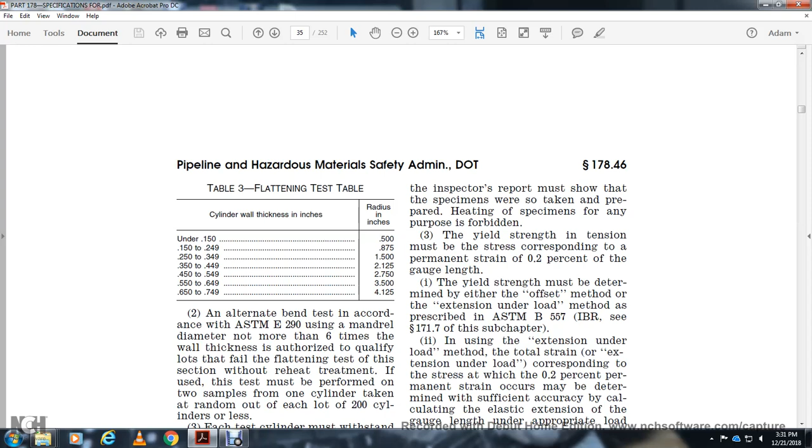In using the extension under load method, the total strain corresponding to the stress at which 0.2% permanent strain occurs may be determined with sufficient accuracy by calculating the elastic extension of the gauge length under the appropriate load and adding 0.2% of the gauge length. Elastic extension calculations must be based on an elastic modulus of 10 million psi.

In the event of controversy, the stress-strain diagram must be plotted with the yield strength determined at 0.2% offset. For the purpose of strain measurement, the initial strain must be set with the specimen under 6,000 psi, the strain indicator reading being set at the calculated corresponding strain, with the crosshead speed of the testing machine not exceeding 1/8 of an inch per minute during the yield strength determination.

Rejected cylinders: reheat treatment of rejected cylinders is authorized one time; subsequently the cylinders must pass all the prescribed tests to be acceptable. Duties of inspection, additional requirements to 178.35: the inspector must verify compliance with the provisions of paragraph B by performing or witnessing the performance of chemical analysis of each melt or cast lot or other unit of starting material, or obtaining certified chemical analysis from the material or cylinder manufacturer for each melt or cast of material, or obtaining a certified check analysis on one cylinder out of each lot of 200 cylinders, with a certificate containing data indicating compliance with the material specification.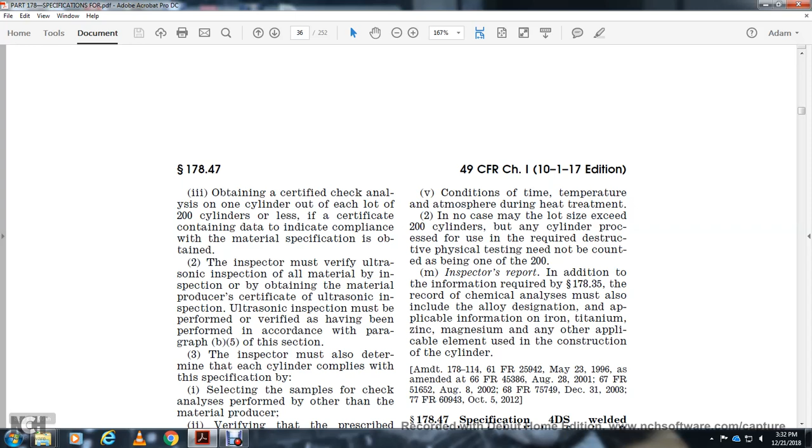The inspector must verify all material inspection obtained with the material producer certification. Ultrasonic inspection must be performed and verified in accordance with paragraph B5 of the section. The inspector must also determine each cylinder is compliant with the specification by selecting samples for check analysis performed by other than the material producer, verifying the prescribed minimum thickness was met by measuring the wall thickness, verifying the identification of the material, and, prior to initial production of a design, verifying that the design qualification testing prescribed in paragraph C6 of the section has been performed with acceptable results.

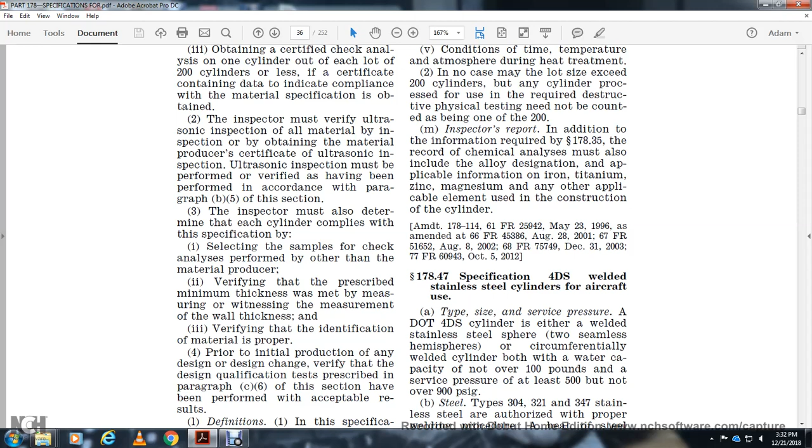Definitions: 1. A lot means a group of cylinders successively produced having the same configuration, specified material, construction process, manufacturer heat treatment equipment, and conditions of time, temperature, and atmosphere during heat treatment, and a lot of not over 200 cylinders. Any cylinder processed for required destructive physical testing need not be counted as being one of the 200.

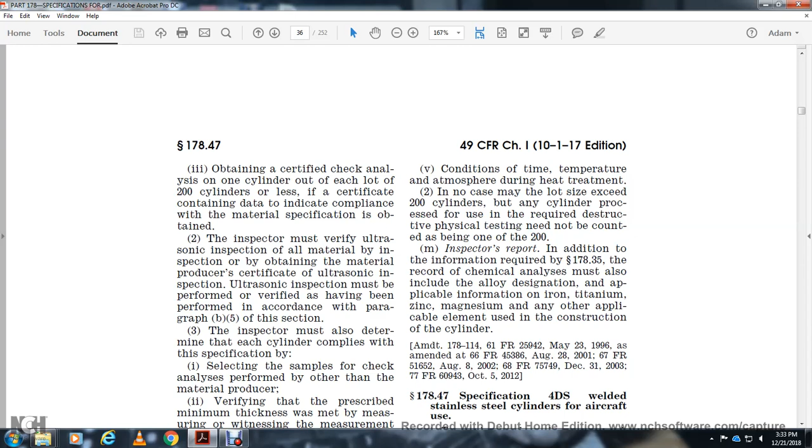Inspector's report: in addition to the information required in 178.35, the record of chemical analysis must also include the alloy designation and applicable information on iron, titanium, zinc, magnesium, and any other applicable element used in the construction of the cylinder.

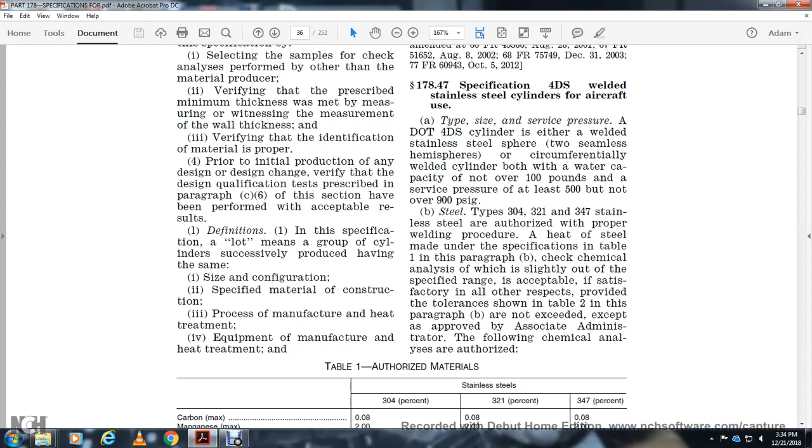Alright, 178.47, specification 4DS, welded stainless steel cylinders for aircraft use. Type and service pressure: a 4DS cylinder is a welded stainless steel cylinder made of two seamless hemispheres, or a cylinder with circumferential weld, with water capacity not over 100 pounds and a service pressure of at least 500 but not over 900 psi gauge. Steel of type 304, 321, or 347 stainless steel with proper welding is authorized. Heats of steel made within the specification in table 1, paragraph B, with chemical analysis slightly out of the specified range but satisfactory in all other respects, may be accepted provided the tolerances shown in table 2 are not exceeded, except as approved by the Associate Administrator.

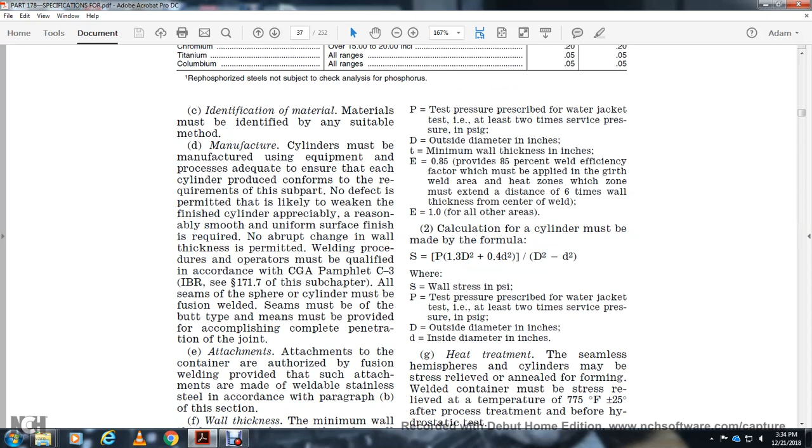Identification of materials: material must be identified by any suitable method. Cylinders must be manufactured using equipment and processes adequate to ensure that each cylinder produced conforms to the requirements of the subpart. No defect likely to weaken the finished cylinder is permitted, and a reasonably smooth and uniform surface finish is required. No abrupt change in wall thickness is permitted. Welding procedures and operators must be qualified in accordance with CGA pamphlet C3. Seams of the sphere and cylinder must be fusion welded, made by means providing complete penetration of the joint. Attachments to the container are authorized by fusion welding, provided such attachments are made of weldable stainless steel.

Wall thickness: the minimum wall thickness must be such that the wall stress at the minimum specified test pressure is not over 60,000 psi gauge, with a minimum wall thickness of 0.040 of an inch. The calculation must be made by the following formula.

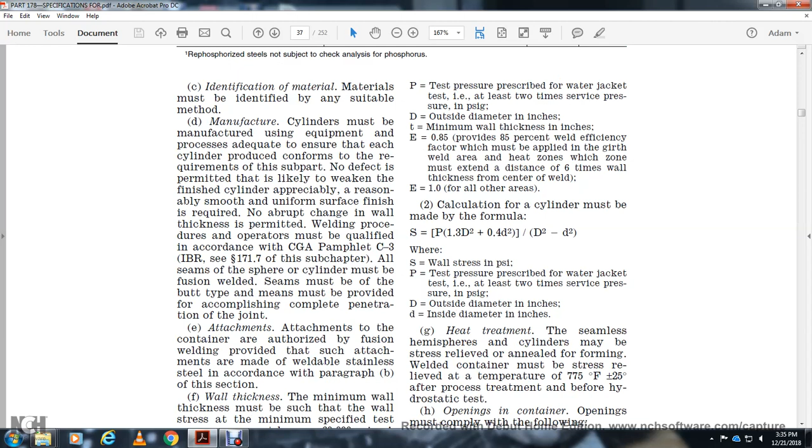Processing treatment before hydrostatic testing. Openings in the container must comply with the following: each opening must be provided with a fitting or pad of weldable stainless steel securely attached to the container by welding. Fittings or pads must be adequate to prevent leakage.

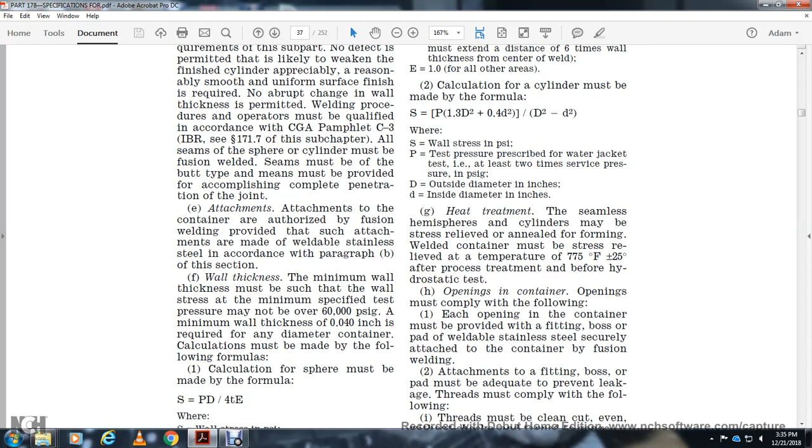Threads must comply with the following: threads must be clean and cut even, without checks, to gauge. Taper threads must have a length not less than the specified American standard taper pipe threads, with at least 4 engaged threads, fitted with a calculated strength of at least 10 times the test pressure.

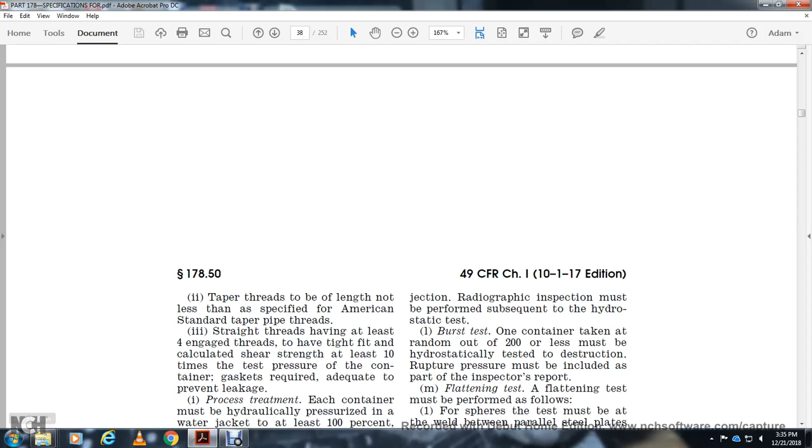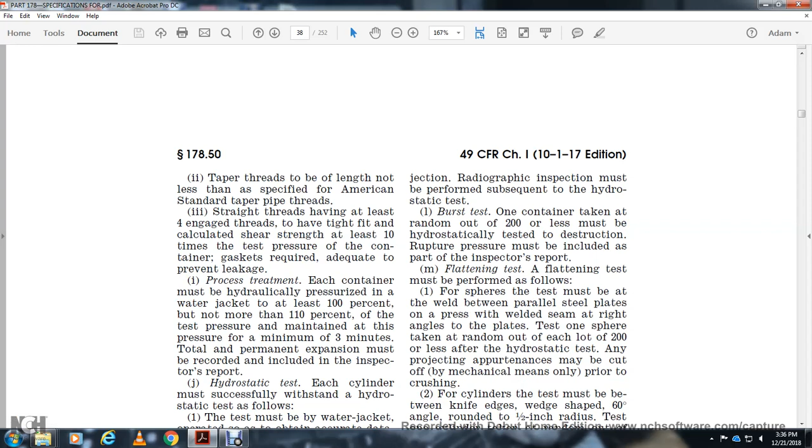Hydrostatic test: each cylinder must successfully withstand the hydrostatic test as follows. The test must be obtained with a water jacket. The accurate pressure gauge must permit reading to an accuracy of 1%. The expansion gauge must permit reading of total expansion to an accuracy of 1% or 0.1 cubic centimeter. Pressure must be maintained for at least 30 seconds, or sufficiently longer to ensure complete expansion due to the test apparatus.

If test pressure cannot be maintained, the test must be repeated with the pressure increased by 10% or 100 psi gauge, whichever is lower. Permanent volumetric expansion may not exceed 10% of the total volumetric expansion. Test pressure: each container must be tested at least 2 times the service pressure.

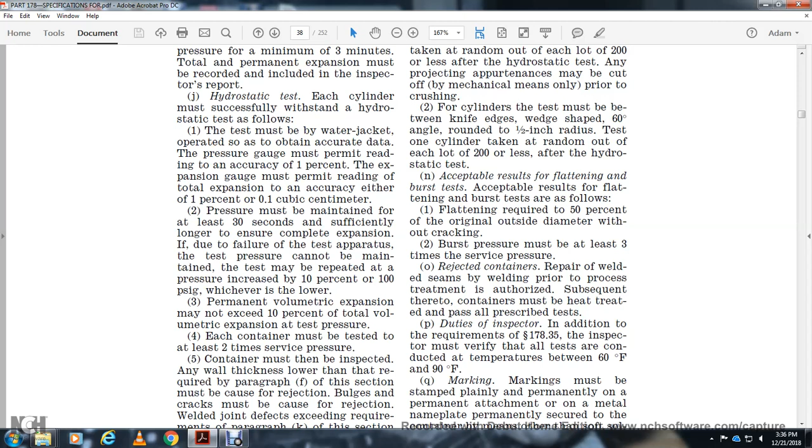The container must be inspected. Any wall thickness lower than required in paragraph F of the section must result in rejection. Bulges and cracks must also result in rejection. Welded joint defects exceeding the requirements of paragraph K of the section must result in rejection.

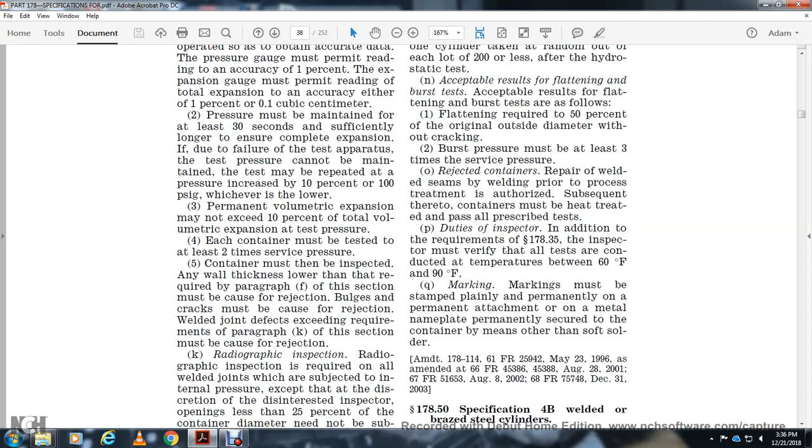Radiographic inspection is required on all welded joints subject to internal pressure, except that the disinterested inspector, openings less than 25% of the container diameter need not be subject to radiographic inspection, unless there is evidence of defects likely to seriously weaken the container and cause rejection. Radiographic inspection is performed subsequent to the hydrostatic test.

Burst test: one container taken at random out of 200 or less must undergo a hydrostatic test to destruction. The rupture pressure must be included as part of the inspector's report.

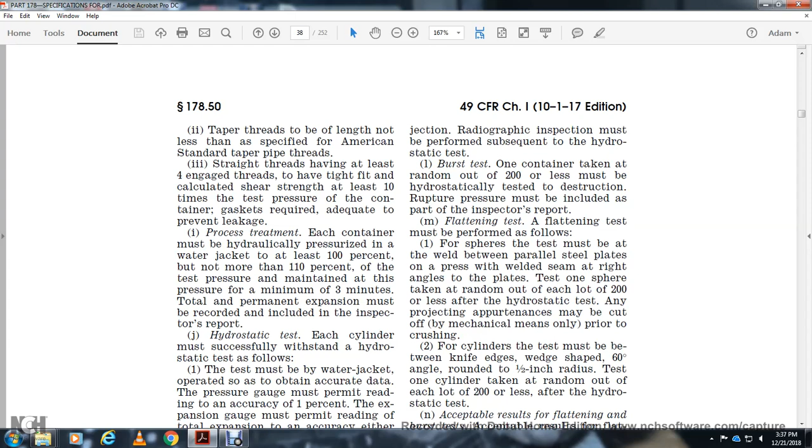The test must be performed between a knife edge wedge shaped at a 60-degree angle, rounded to a half-inch radius. One cylinder is taken at random out of each lot of 200, or less after the hydrostatic pressure test.

Acceptable results of the flattening and burst tests: for the flattening test, flattening is required to 50% of the original outside diameter without cracking. Burst pressure must be at least 3 times the service pressure.

An inspector must verify that all tests are conducted at a temperature between 60 degrees Fahrenheit and 90 degrees Fahrenheit. Markings must be stamped plainly and permanently, with the nameplate permanently attached to the container by means other than soft solder.

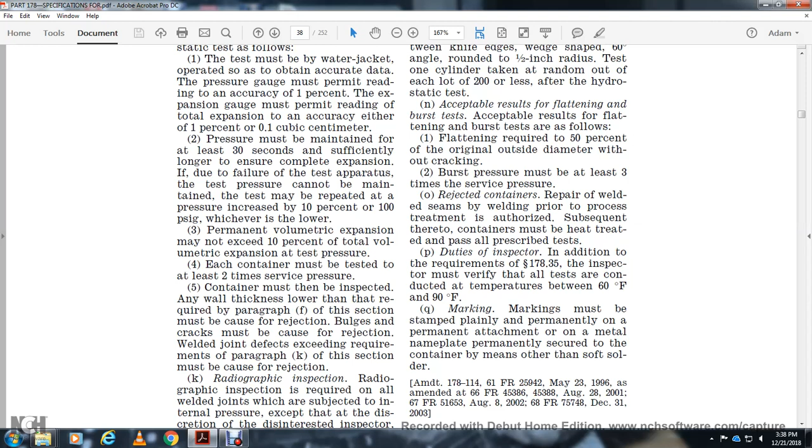178.50, Specification 4B, welded or brazed steel cylinders.